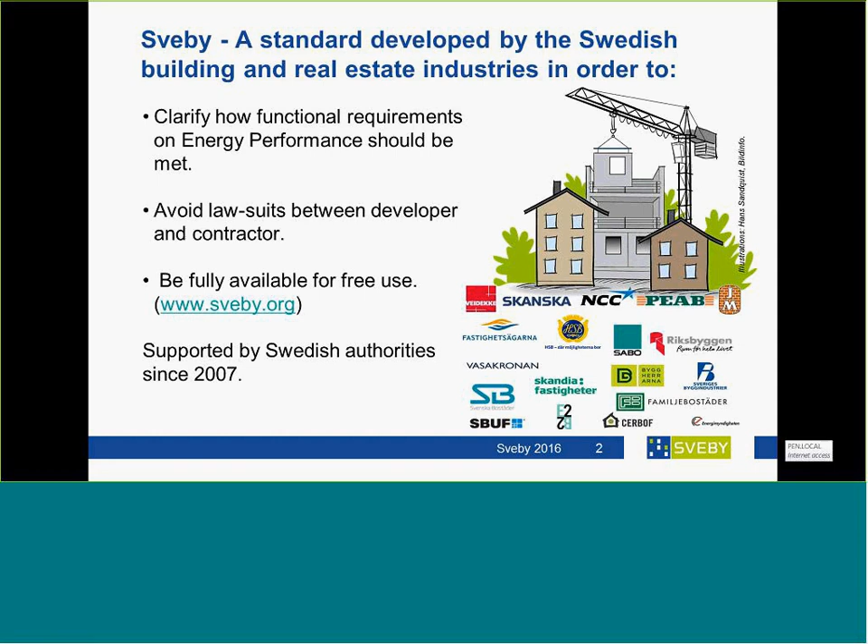So in this context, we did an energy performance calculation competition, which we also did 5 years ago. This is to obtain results from calculation programs and different users and see the spread on the predictions of the energy use with the same conditions. And we also want to promote the use of the Sveby standards and verification methods that we have developed.

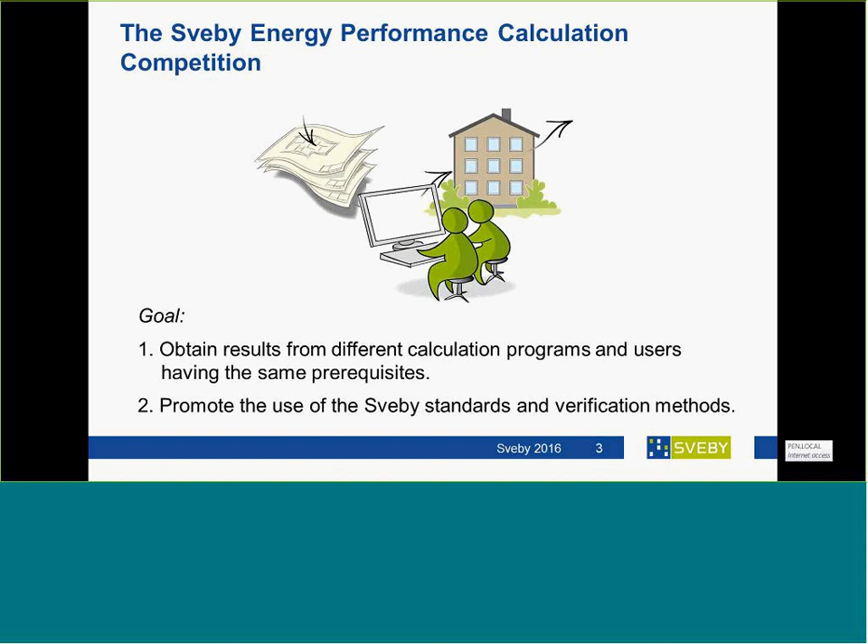So the case here is a preschool built in 2014 up in the north of Sweden, where we have measured energy use for heating and domestic hot water, building electricity and tenant electricity. All the contestants were given access to drawings and relevant information. We had 27 registered competitors, and 19 of them completed their task. We did it in 3 stages.

First, you did it only by drawings, and when the building was done, the design was finished, and then the occupancy came in the first year, and we verified that with the verification stages. So it's 3 steps really.

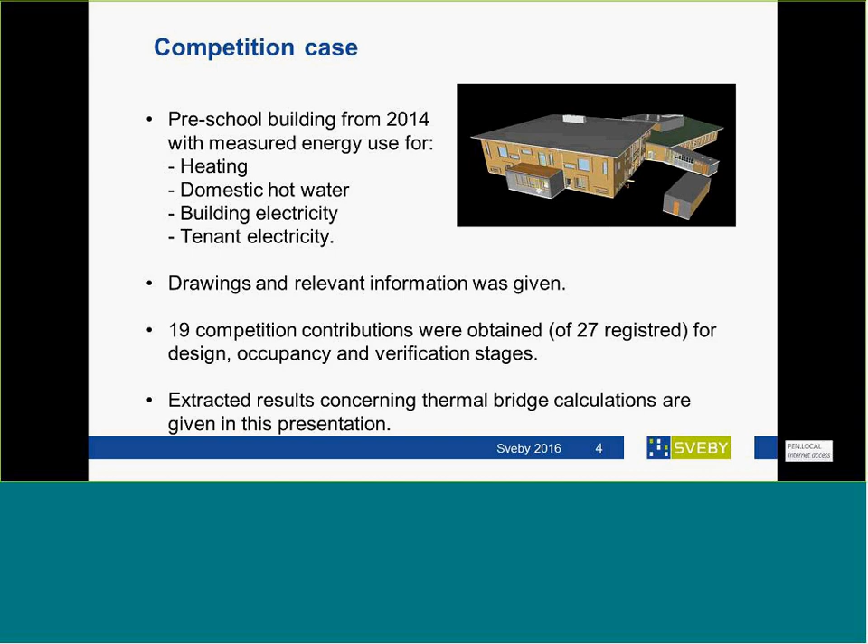In this presentation, I'll give you the results concerning thermal bridges only. There were a lot of other results and also a lot of input and outputs from the programs, of course. The people contributing to this are consultants working in the business of energy calculations and design of buildings.

So as the results here, the share of thermal bridges of the total conduction heat loss, you can see the contestants from A to S, here 19 of them, and the percentage value for the thermal bridges of the total building conduction heat losses. As you can see, it ranges from 3% with person L and G to 30%. So it's a factor of 10.

It's very different, although many have a common level of between 10 and 20 units. And this is their calculations. So why is it?

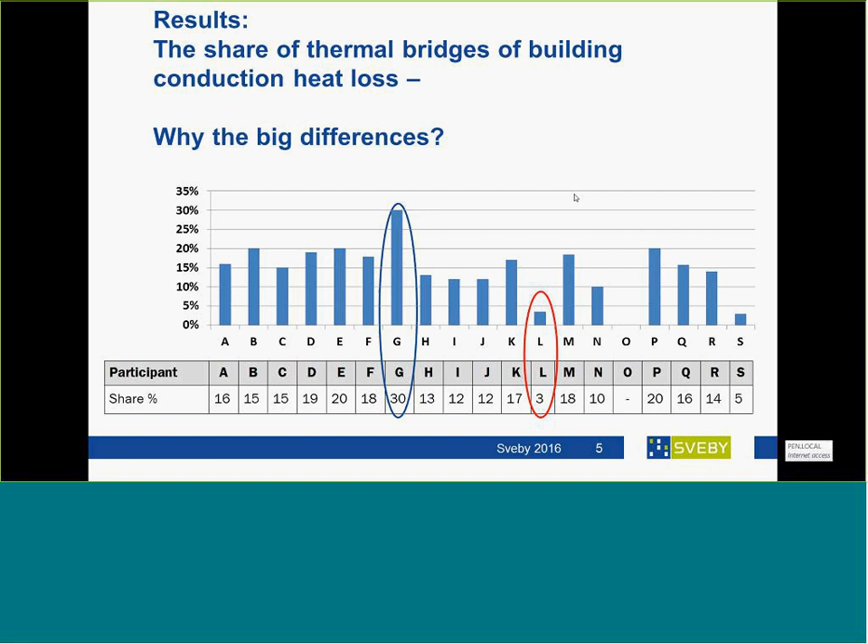If you look at the heat loss factor from the thermal bridges, the other was a part of the total, so this is narrowed down to just the thermal bridges. We can still see that contestant G has very high, but not the highest heat loss from the thermal bridges, and we see L also.

The information we got from the contestants was that contestant G had an assumed percentage-based value on the thermal heat loss. So you first calculate the U times A heat loss, the sum, and then you add for the thermal bridges a percentage value, in this case 30%.

Some of them calculate detail by detail, also with some assumptions, or some computer programs give you the details by detail. As a default, you can choose between poor, good, and excellent on a scale. And 3 of them have calculated based on the drawing details that were given for the building envelope. They have calculated the individual thermal bridges and added them together. So it's still a big difference here.

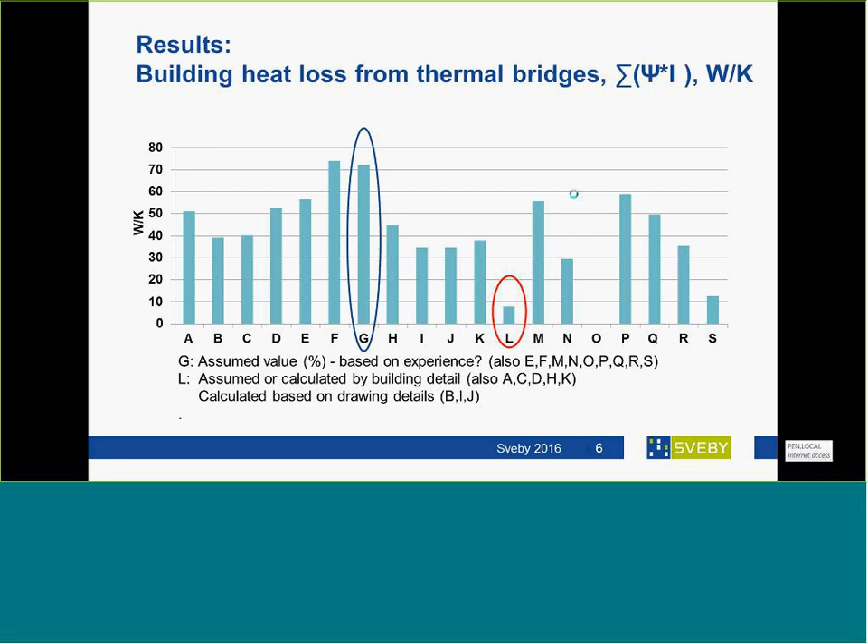If you look at the total building energy performance calculated by all these people, the red parts are the heating to the ventilation system or heating to the radiators. You can see that L, which has a very low thermal bridge, has higher heating than G, that had a very high thermal bridge, so there's very little connection between thermal bridge losses and the heating energy losses for the total.

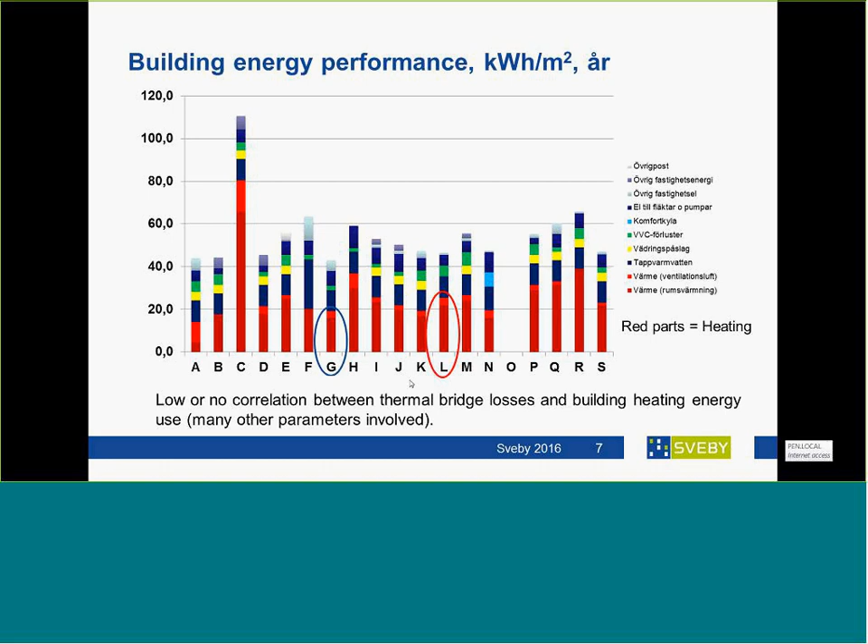There are many factors that influence the total energy performance of the building, of course, in the calculations. We tried to narrow it down; we told them to use the same climatic data, which about 75% did, and the others didn't. There are many other factors that influence this, of course, and thermal bridges are a small part of it. So why are there differences?

Well, you use experience values as an additional percentage to the heat loss factor, the sum UA, or just an addition to U values. It's very different, and you cannot really keep track of all the additions normally. You have what Björn told us, the one-dimensional U value that is used instead of the 2 or 3-dimensional calculations.

There are different built-in defaults in the energy calculation software, which give you the difference, and every calculator is an expert on his program, or he uses the same value normally as the previous time.

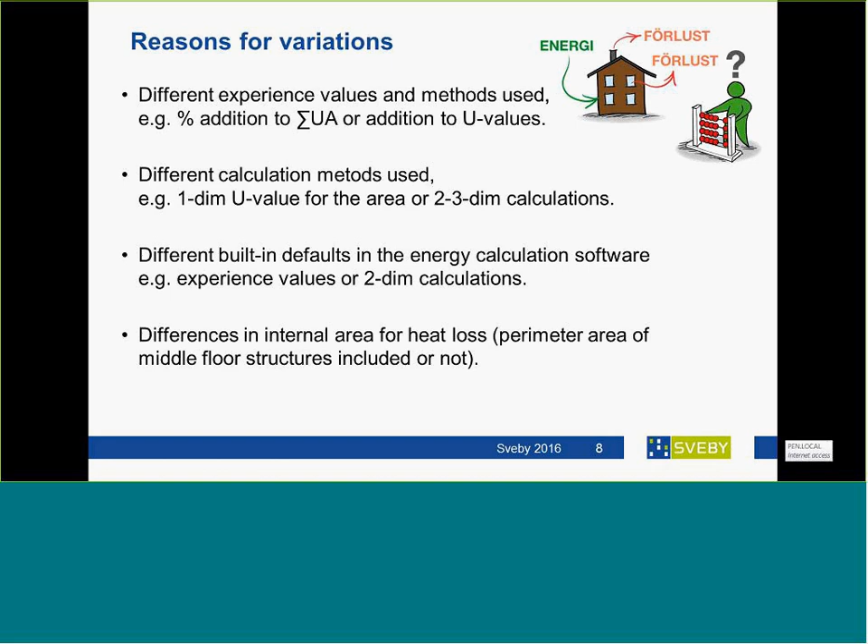And then we have the area differences, where you have the overall internal measures or the wallpaper concept, where you don't calculate the middle floor structures, which are left out basically. That is what it's called in the Swedish building code, the wallpaper method. So actually the thickness of the intermediate floor structures is not included at all in the overall internal area.

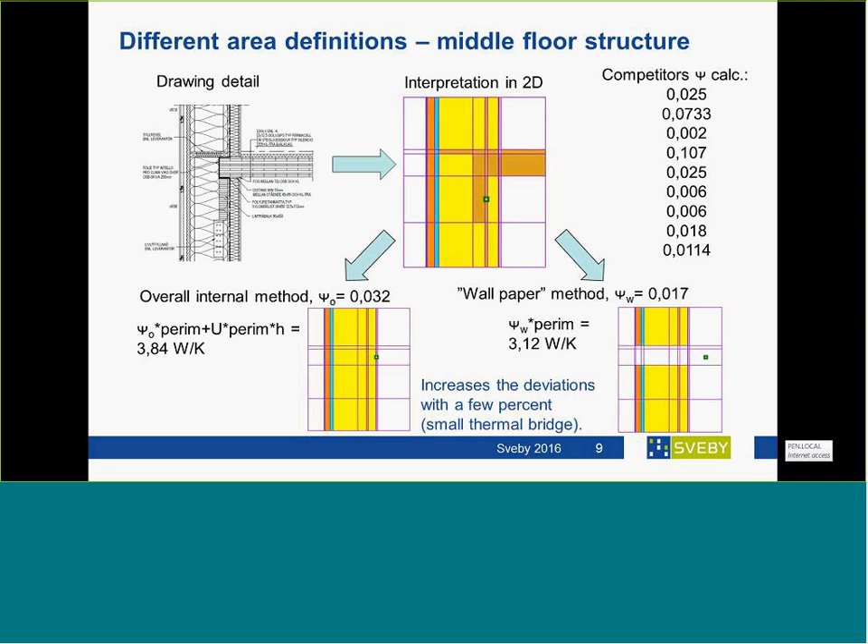So this difference would cause a deviation of a few percent, even though this is a very small thermal bridge with low values. And you can see the spread on the competitors' calculations up to the right, where it is a factor of 10 at least.

And what happened since 5 years ago? Last time nobody did the two different calculations. So that's an improvement.

The use of the standards is still better, and some programs have developed routines for the thermal bridges, but it's not really proving that; the programs have their own interpretation of the thermal bridges and the area, so it can be different. Visualization is improved in some cases, so things happen.